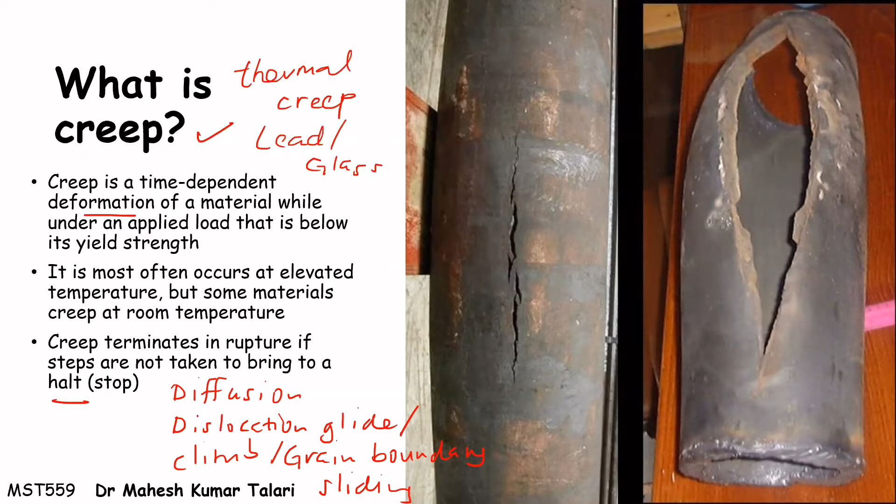Diffusion, dislocation glide or climb, or grain boundary sliding. All these can contribute to the creep of metallic materials.

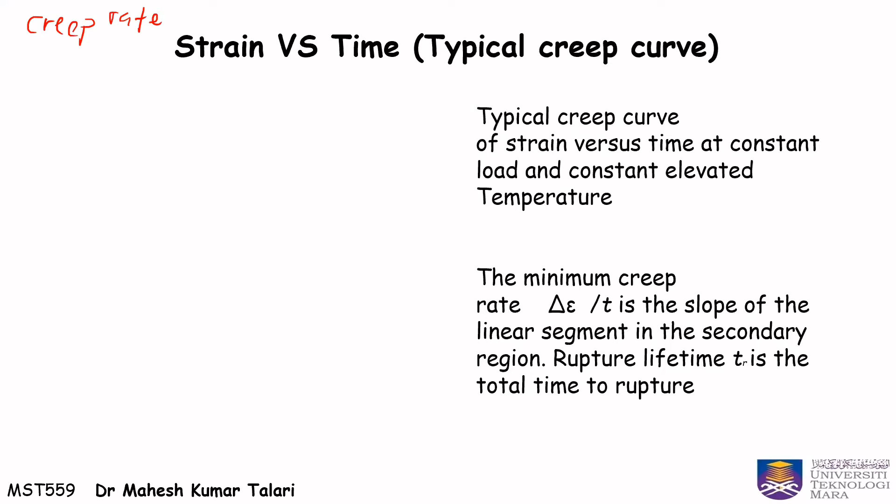So the rate of deformation is what we call the creep rate. It is the slope of the line in a creep strain versus time curve, as what we have here in the figure.

The results of a creep test are usually plotted as a creep curve where we plot the creep strain as a function of time, because we are keeping the stress constant. So unlike what we have in a stress-strain diagram, in the case of creep we have a strain-time diagram, because it is a continuous plastic deformation as a function of time. So we can say that strain is plotted as a function of time.

The minimum creep rate, or change in strain over time, is the slope of the linear segment in the secondary region here. And the rupture lifetime, T sub R, is the total time to rupture.

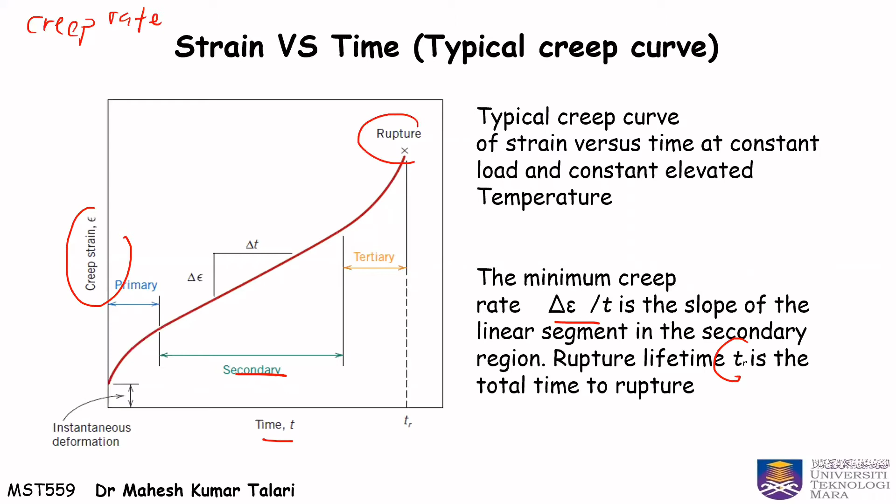So here are some characteristics of creep. Creep is a time-dependent permanent plastic deformation, which generally occurs at a high temperature, at T higher than 0.4 times the melting point, under a constant loading or stress.

It can also happen at room temperature for a soft metal such as lead, like what I have mentioned before, or glass. It is a very slow process where deformation changes with time.

Creep is important in applications such as turbine blades in a jet engine, gas turbines, power plants, such as a boiler and steam line, which must operate at high stresses and high temperature without any changes in dimension.

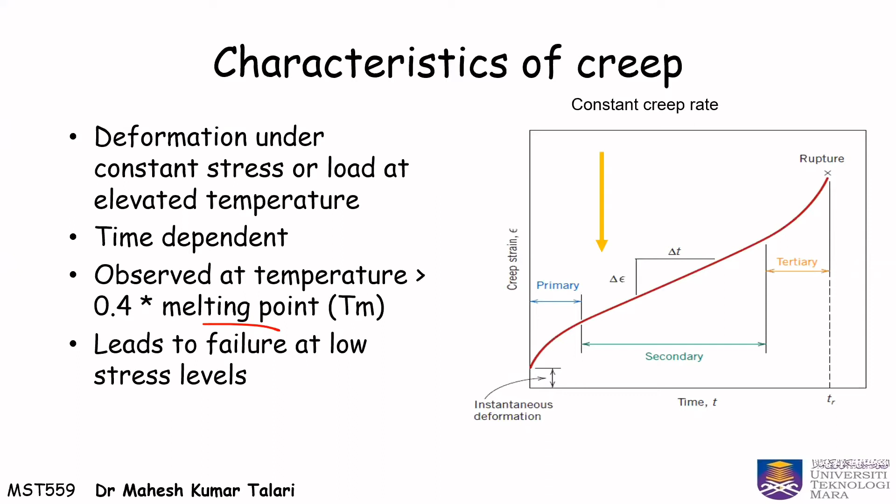So here are some more characteristics of creep. Creep in service is usually affected by changing conditions of loading and temperature. And the number of possible stress-temperature-time combinations is infinite.

And the creep mechanism is often different between different types of materials such as metal, plastic, rubber, or concrete. Creep is a time-dependent deformation under an applied load.

Metals or alloys do not exhibit time-dependent deformation under normal service conditions. So when a metal is subjected to a constant loading at elevated temperature, the metal will undergo a time-dependent increase in length.

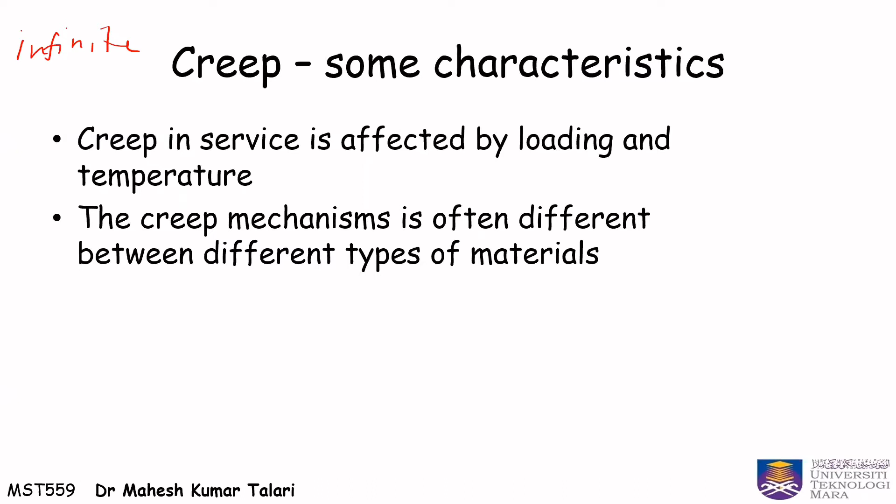So we have a strain versus time graph. This figure shows strain as a function of time, like what I have shown you previously. The portions are split as primary, secondary here, and tertiary curve.

In the beginning here, the rate of strain is quite high, and then it stabilizes due to work hardening. And then we have, in the second segment, the strain rate is minimum and nearly constant, which happens as a result of a balance between annealing and work hardening.

Annealing and work hardening. And then we have a tertiary segment that is similar to the necking phenomenon observed when metals are tension tested in a universal testing machine.

So the strain versus time graph is plotted with a constant loading applied at a constant temperature. The shape of the creep curve will depend on the levels of temperature and stress that we apply. And if the temperature remains constant, then the creep curve will shift upward and to the left with increasing applied stress. We will talk more about that later.

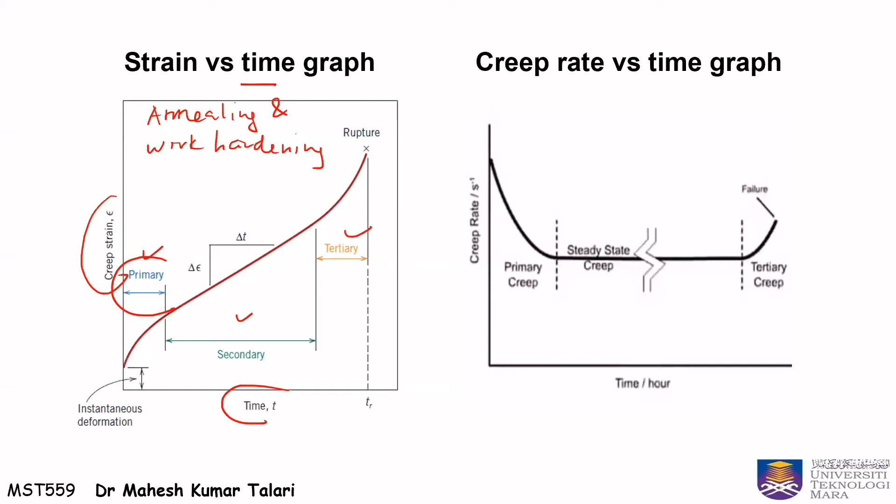So here we also have a creep rate versus time graph. And here we can see that in a primary creep stage, the creep rate decreases until it reaches a steady state creep that will occur for a very long time. This period of almost constant creep rate is the period that forms the bulk of the creep life of a component until it reaches a tertiary creep stage, when the creep rate suddenly increases until the material reaches failure.

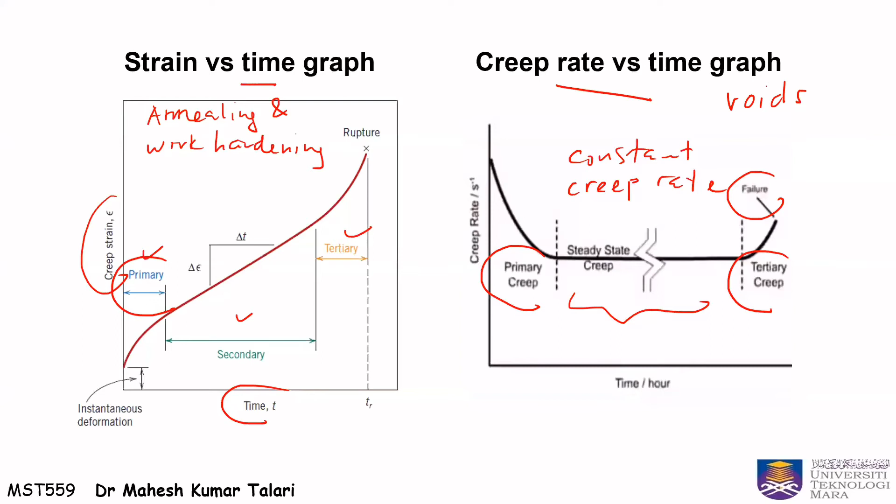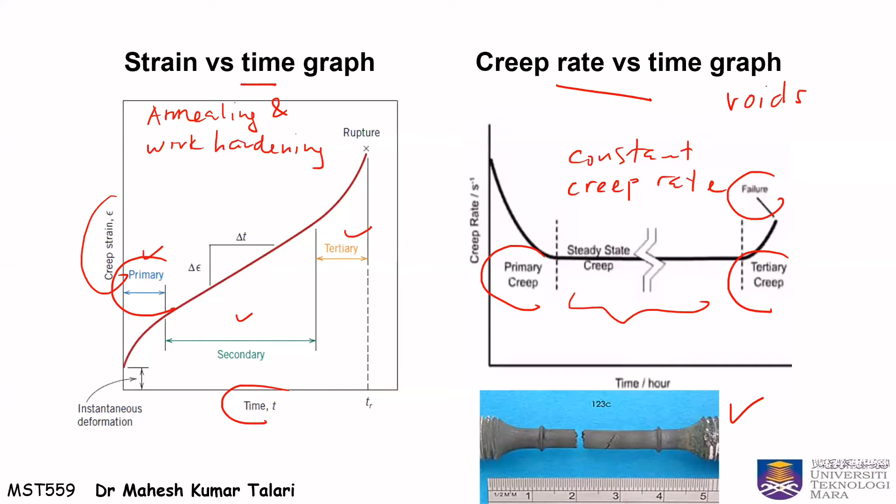So here we have some of the definitions of the creep stages. We have primary creep, where the slope or creep rate decreases with time and strain hardening occurs, and then we have secondary creep, which can be described as a steady state. The rate is constant and the plot becomes linear, and then we have tertiary creep, where there is an acceleration of rate and ultimate failure.

So the deformation processes in creep, which occur at elevated temperature, are due to the movement known as slip dislocation, or slip, or they can be due to grain boundary sliding, or sub-grain formation. So all these deformation processes in creep that occur at elevated temperature are due to all these phenomena.

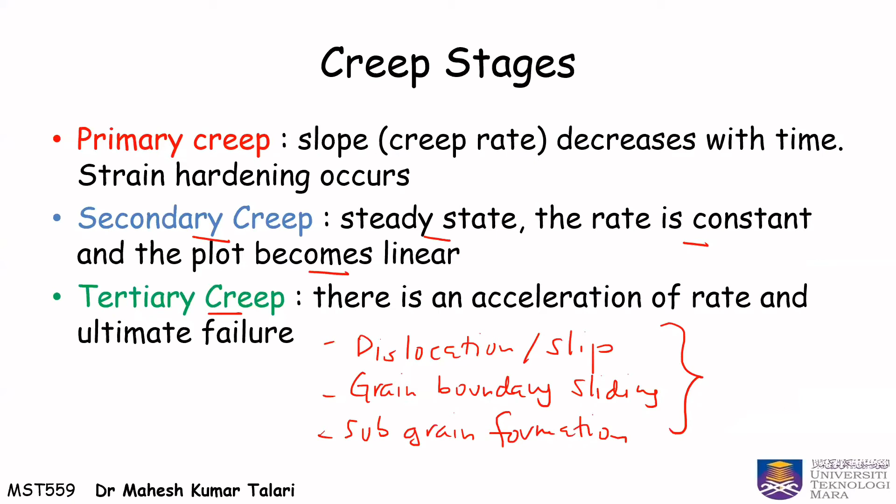And here we have another characteristic of each creep stage. In the primary stage, creep starts at a rapid rate and slows with time. In the secondary stage, creep has a relatively uniform rate, and in the tertiary stage, the creep has an accelerated rate and terminates when the material breaks or ruptures.

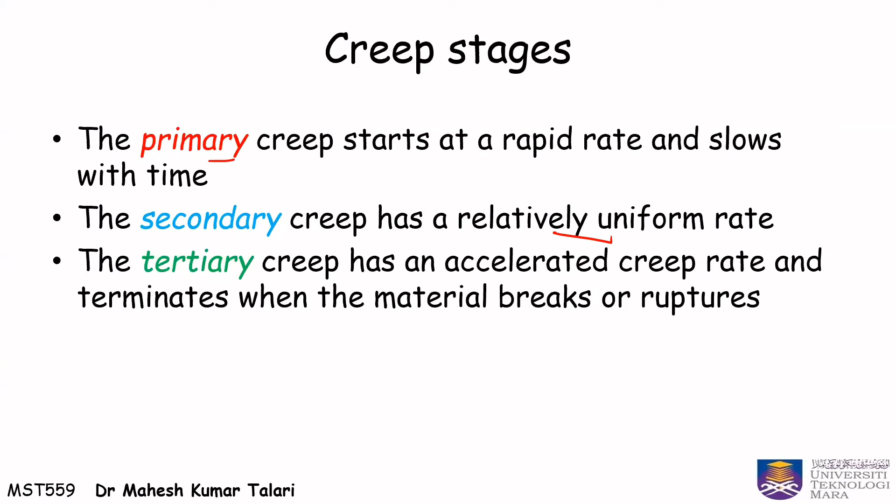So now we will be discussing the stress and temperature effect on creep rate, and there are various types of creep deformation, like what I have mentioned before, including dislocation creep, diffusion creep, or bulk diffusion or grain boundary diffusion, dislocation climb, glide creep, and thermally activated glide creep. And all these different creep mechanisms will depend on the temperature at which the deformation is happening, the stress level experienced by the material, and also the material's microstructure and composition. And the effect of temperature and stress can be observed in the figure here.

So here, at temperatures below 0.4, or 40% of the melting temperature, and after the initial deformation, the strain is virtually independent of time. But with increasing stress or temperature, the instantaneous strain at the time of stress application increases, and we can see that the steady state creep rate is increased and the rupture lifetime is decreased. So what we can conclude here is that creep is temperature dependent. When our specimen is hotter, the creep strength will be lower and the faster creep will occur, especially for metals, where creep really takes off at 40% of the melting temperature.

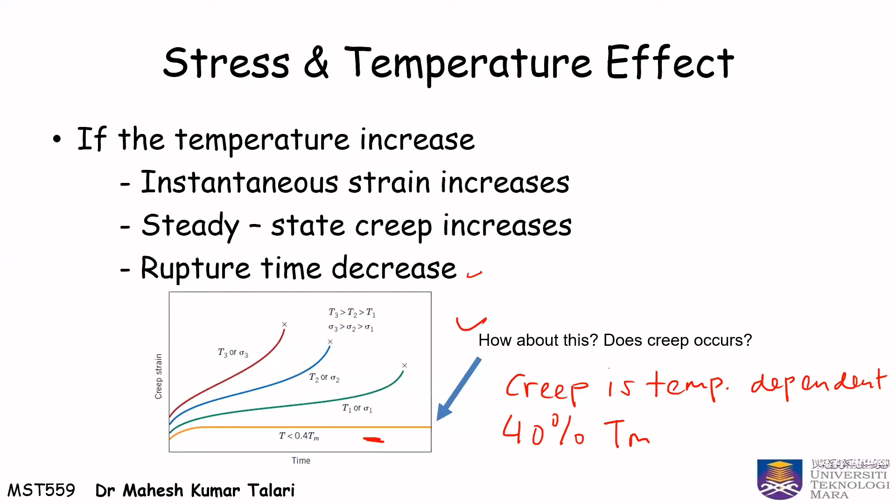So here we have the effect of stress and temperature on steady state creep. At a constant temperature, the steady state creep data will follow this equation. Maybe you cannot see it clearly, but here we have the change in strain over time equals C sigma to the power N, where C and N are material constants. In some references, we can replace C with K.

When stress is constant, steady state creep will follow this equation. Here we have the creep rate equals A e to the power of minus Q over RT, where A is a constant, Q is the activation energy, R is the gas constant, and T is the absolute temperature.

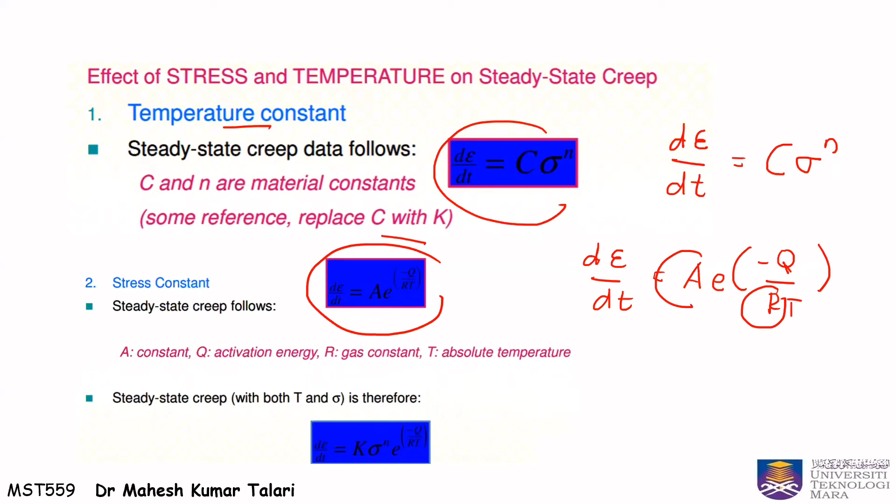So here we have a creep test. A creep test involves a tensile specimen under constant loading maintained at a constant temperature, and the measurements of strain are then recorded over a period of time. As we already know, creep is a high temperature progressive deformation at a constant stress. When we say high temperature, it is a relative term that is dependent upon the materials involved.

Creep tests are used when we want to evaluate materials for applications such as a boiler, a gas turbine, a jet engine, an oven, or any application that involves high temperature under loading. So understanding the high temperature behavior of metals is very important when we want to design a failure resistant system. If we want to determine the creep characteristics of a material, a constant stress is applied to a heated specimen in the creep testing.

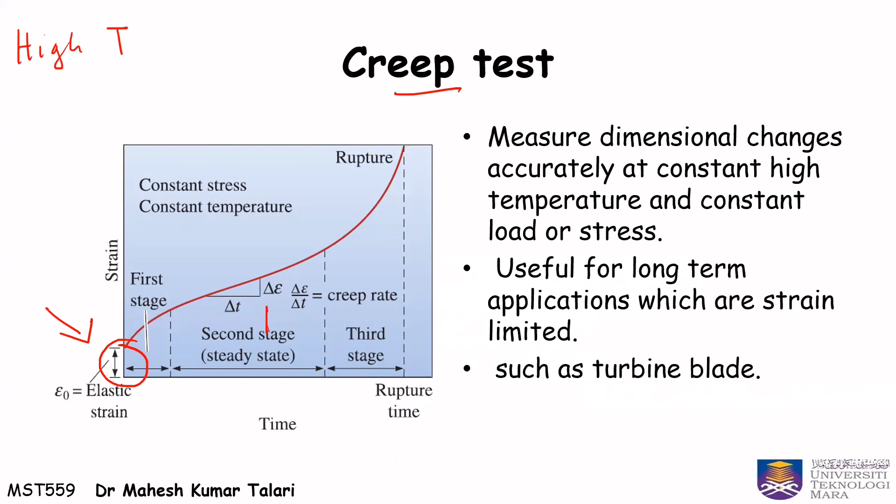As soon as the stress is applied, the specimen will stretch elastically by a small amount, strain naught, like what we can see here. This depends on the applied stress and the modulus of elasticity of the material at a high temperature. Creep testing can also be conducted under constant load, and it is quite important from an engineering design viewpoint. During the creep testing, the strain or elongation is measured as a function of time and plotted to give the creep curve, like what we have discussed previously.

In the first stage of creep of metals, and I give metals as examples of materials, many dislocations climb away from the obstacles, like what we can see in the figure here, and contribute to deformation. Eventually, the rate at which dislocations climb away from the obstacles will equal the rate at which dislocations are blocked by other imperfections. This will lead to the second stage, or steady state creep, and the slope of the steady state portion of the creep curve is the creep rate, like what we can see in the equation here.

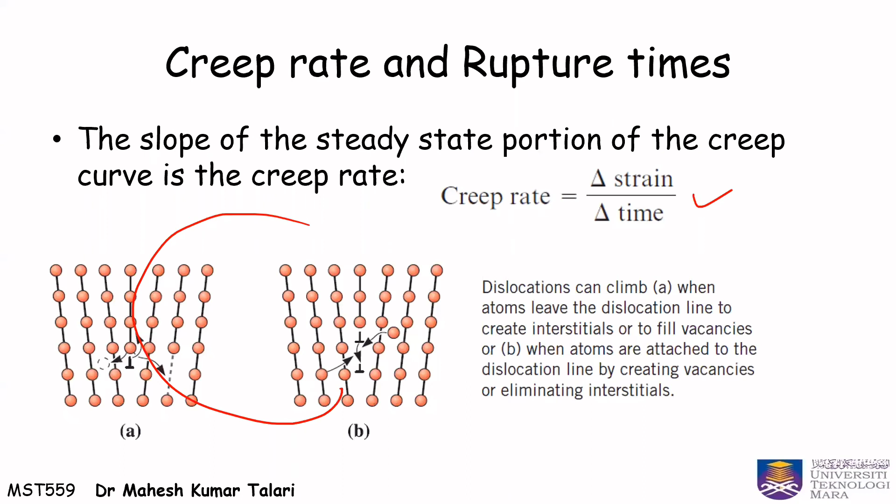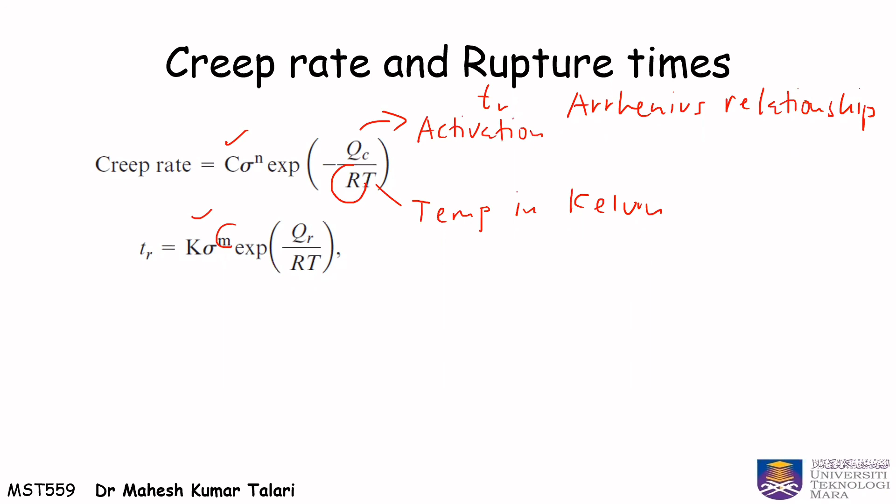C, K, and m are all constants for the material. Q_c is the activation energy for creep, and Q_r here is the activation energy for rupture.

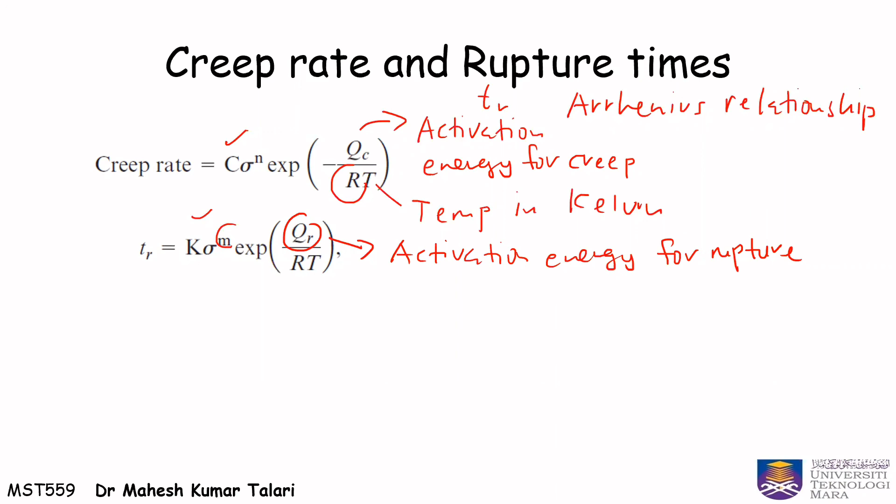In particular, Q_c is related to the activation energy for self-diffusion when dislocation climb is important. In a crystalline ceramic, other factors including grain boundary sliding and nucleation of microcracks are particularly important. Oftentimes, non-crystalline or glassy material is present at the grain boundaries, and the activation energy required for the glass to deform is low, and this will lead to higher creep rates compared with a completely crystalline ceramic. For the same reason, creep occurs at a rapid rate in ceramic glasses and amorphous polymers.